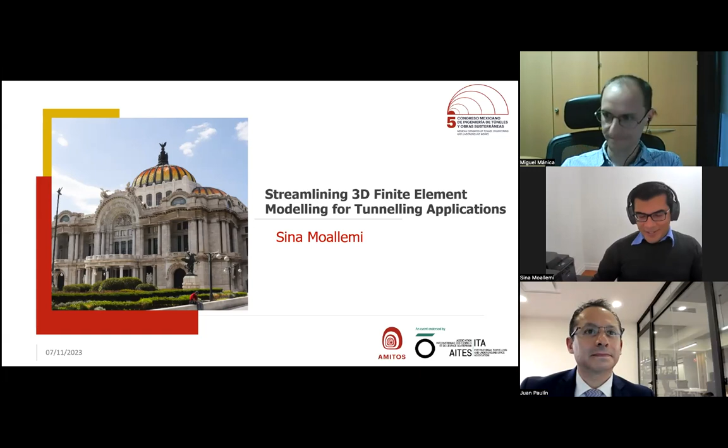Okay, without further ado, let's talk about tunneling. So the topic for today's presentation is streamlining 3D finite element modeling for tunneling applications. The agenda for today is shown here. First, I'm going to introduce briefly Rocscience and one of our programs called RS3. I'll introduce you to the tunnel designer tool that we have in the program, and then we do a demo together to create a 3D model with tunneling and sequential excavation.

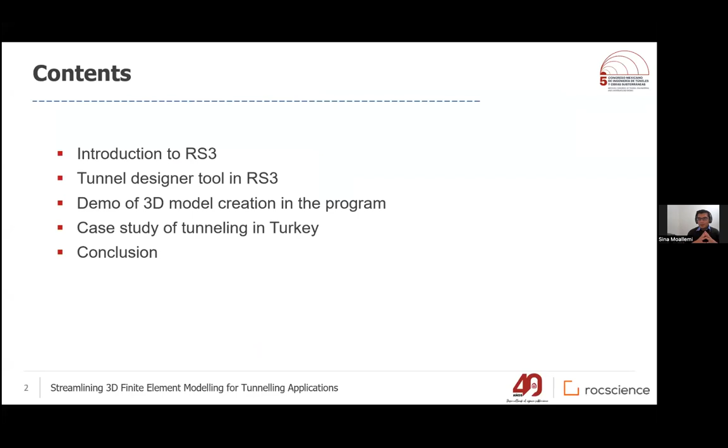Then I show you a case study that I created based on one of the papers and real cases in Turkey, and at the end we are going to do the final conclusion. So about Rocscience, we are the world leader in developing innovative 2D and 3D software for civil, for mining, and for geotechnical engineering.

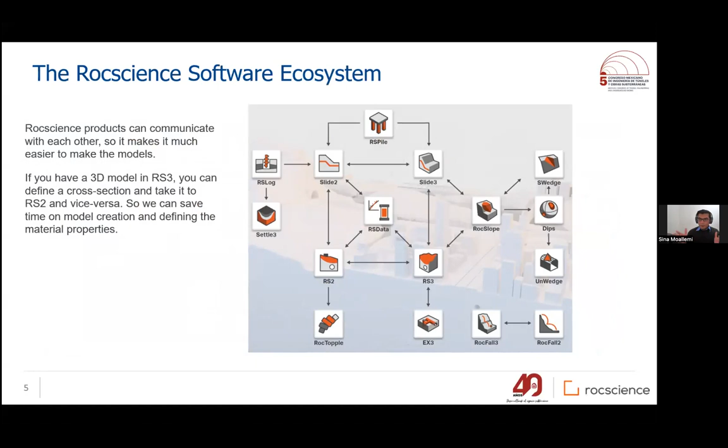One of the benefits of using our programs is that they can communicate with each other. For example, if you have a 3D model and you want to take a specific section into RS2 and do the 2D analysis on it, in your program, you can create it. You don't need to recreate your geometry. You don't need to go and redefine your material properties. So these are all the benefits that you can get if you use a combination of our products.

But today's focus is on RS3. RS3 is our 3D general finite element package with a wide range of applications. I can categorize that into mining engineering and civil engineering. For mining, you can do a slope analysis. You can do modeling of large-scale mines, as you can see here, or you can do sequential underground excavation.

We recently added a new functionality to the program called Discrete Fracture Network, which makes modeling joints in 3D and creating them in 3D much simpler than before. It's going to make RS3 very unique in the market.

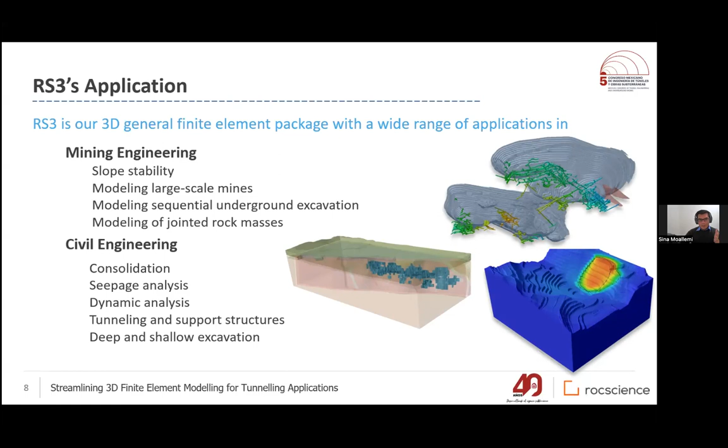And for civil engineering, you can do consolidation, seepage analysis, dynamic analysis. With the built-in tool that is called Tunnel Designer, you can create tunnels, you can assign the supports, and that's what we are going to focus on today. And also you can do deep and shallow excavation.

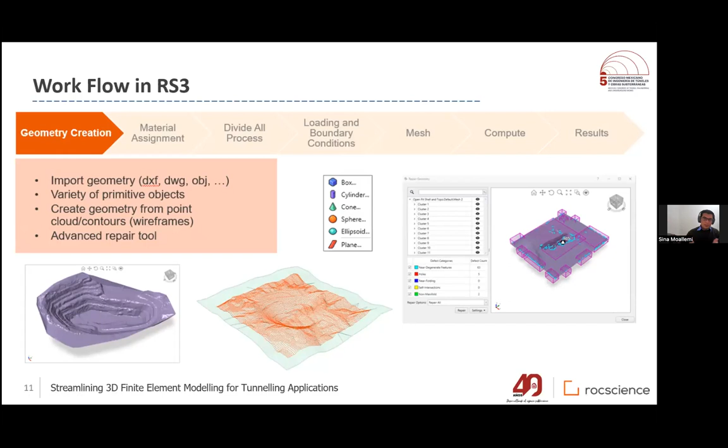We have a very powerful repair tool, so it can look at the geometry. If, for example, there is a hole on the surface, or if there is a very edgy surface in the imported geometry, it can fix it for you, it can repair it for you. Also, if you have, for example, a point cloud, you can import it to the program, and then it's going to create the surface based on the imported points for you.

Next step is defining the materials. In RS3, we have a comprehensive material library for soil and for rocks, like Mohr-Coulomb, generalized Hoek-Brown, anisotropic materials. In addition to that, we have a borehole manager, so if you know the location of the boreholes and you know the layers, the thickness of each layer and the assigned material, you can define them in the program, and we are going to create the geometry for it. That's actually what we are going to use in the demo today.

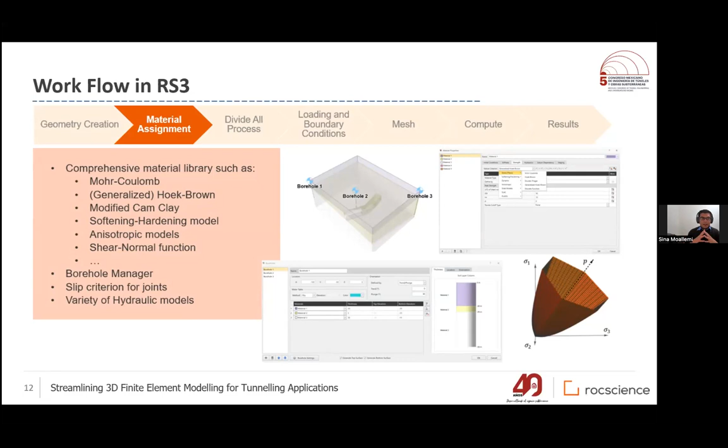And then you need to do a 3D Boolean operation when you are bringing different objects, different volumes and surfaces to the model. We need to find the intersections between them, and that's what you are going to do in the divide all process. The first three parts are almost shared between all of our 3D packages.

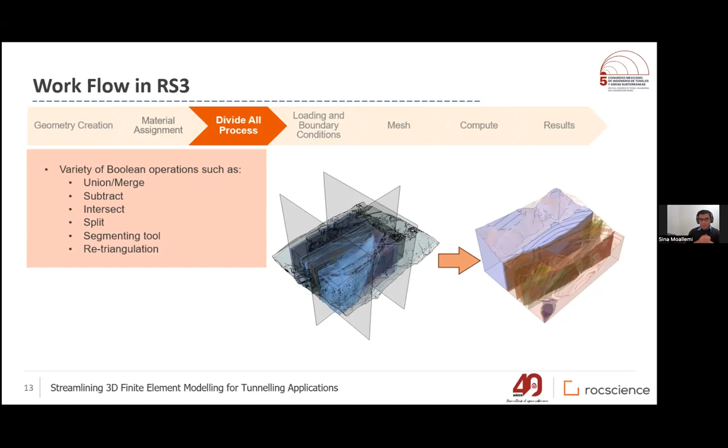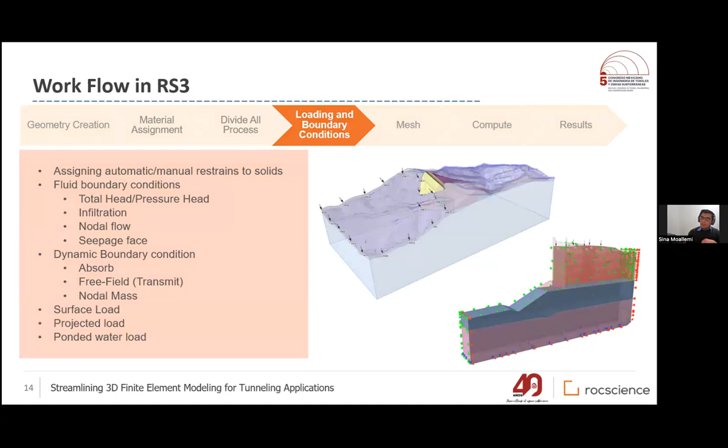Depending on the type of analysis that you have, for example, if you have seepage analysis or dynamic analysis, you can have different types of boundary conditions. You can, for example, assign the total head or pressure head on one side of the geometry. You can have, for example, absorbing boundary condition, nodal mass, or free field. If you have the dynamic analysis, you can also define the projected load. So you set the location of the load, and then it's going to project it to your geometry, which makes the modeling much easier.

After you define the loading and boundary conditions, you need to define the 3D mesh. In RS3, we have tetrahedral elements. They can be either 4-noded or 10-noded. The mesh generation is automatic in the program, but if you want to, let's say, create a denser mesh in a specific area, you can tell the program by defining a refinement region.

And after you define the mesh, it's all ready to do the computation. In RS3, you can also do the SSR analysis, which is shear strength reduction method. So if you have a slope, you can find the factor of safety. You can do fully coupled or uncoupled solid fluid analysis, and also dynamic simulation.

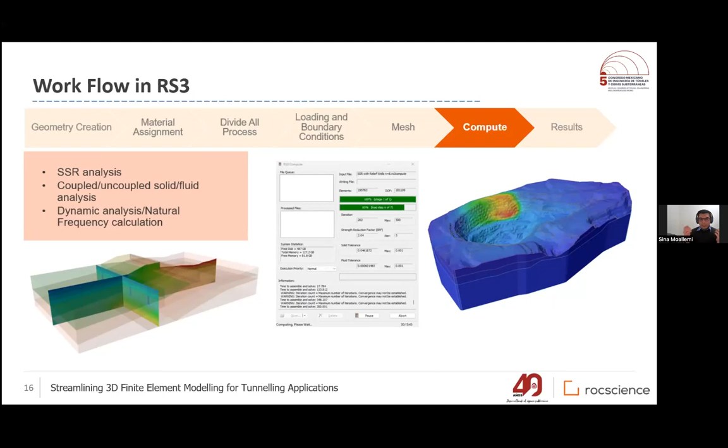When your analysis is done, you can go to the result tab and see your results. You can see them on the external boundary, and the excavation boundaries. You can, for example, have cutting planes to see the results on a specific plane that you want. Or you can define query lines, and export them to Excel to compare your results with, let's say, analytical solution.

Also, if you have sensor data or LiDAR data, or have them as a CSV file, you can import them into the model and compare your results with the measured data from the site. That's another functionality that we have in RS3.

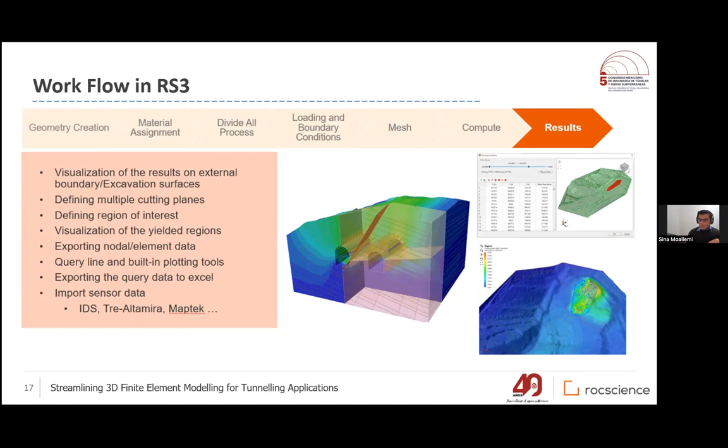So that was a brief introduction of the program. But now let's talk about tunneling and how RS3 can help us for modeling tunnels. We added a feature a few years ago in RS3 called Tunnel Designer. But before I explain it, I want to mention why we added this tool to the program.

Imagine you have a simple tunnel, let's say a cylindrical shaped tunnel, and you want to do sequential excavation. Before we added this feature, you needed to divide the cylinder into smaller pieces, then define multiple stages, pick each of these small pieces, and update the materials to tell the program this region is going to be excavated. And then if you want to have, for example, bolts or liner around the tunnel, you need to pick the surface and do all of these steps manually, which can be extremely frustrating and time consuming.

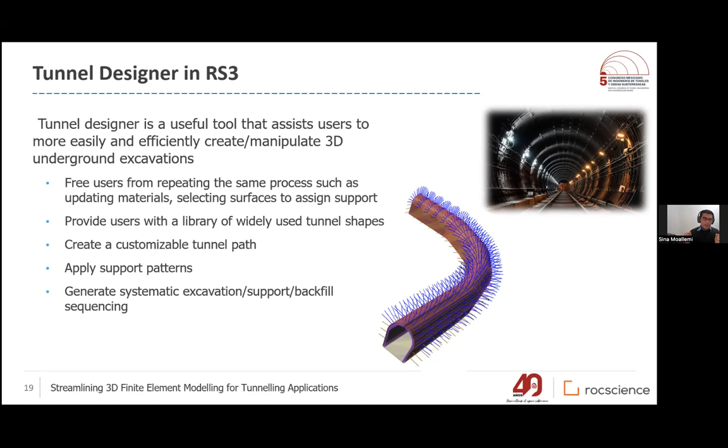And for each tunnel, there are different functions. For example, you can define the profile, the shape of the tunnel. You can define the path. You can define the sequence of the excavation.

The steps of using the tunnel designer tool are shown here. First, you need to create the profile of the tunnel. You can even draw it in the tool, or if you have the location of them, like in AutoCAD, you can import the coordinates and it's going to create it for you.

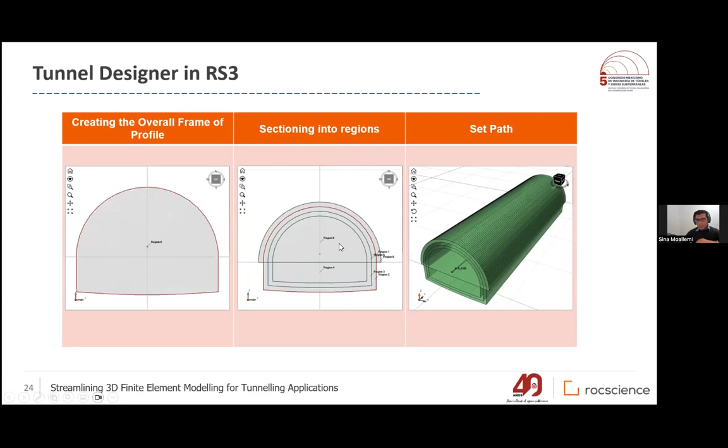Then you need to section your profile into smaller regions in case you need to. For example, if you want to excavate first the top part and then continue the bottom part of the profile, you need to define multiple sections here. And then you need to define the path to make it 3D.

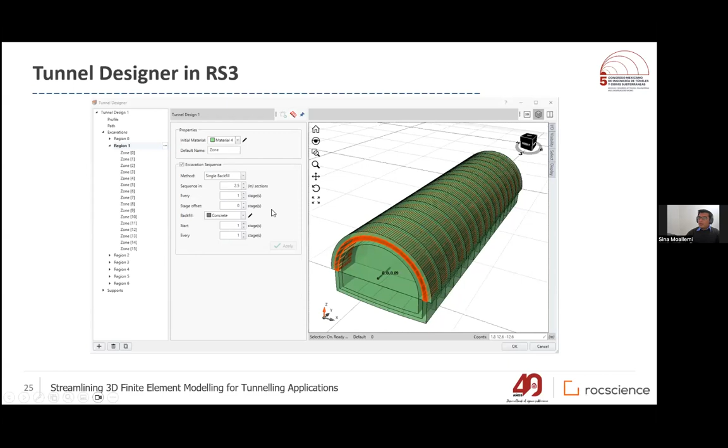Then you can define the sequence of excavation. For example, you can tell the program, excavate for me every 2.5 meters, and keep repeating that at each stage. You can see that initial tunnel path we had, now it's divided into smaller pieces with a length of 2.5 meters.

And then you can go and define the different types of supports. In RS3, we have beams, bolts, and also liners. And then you can mention when these supports are going to be added to the program. So it's a general scheme of how you can use the program and the tool.

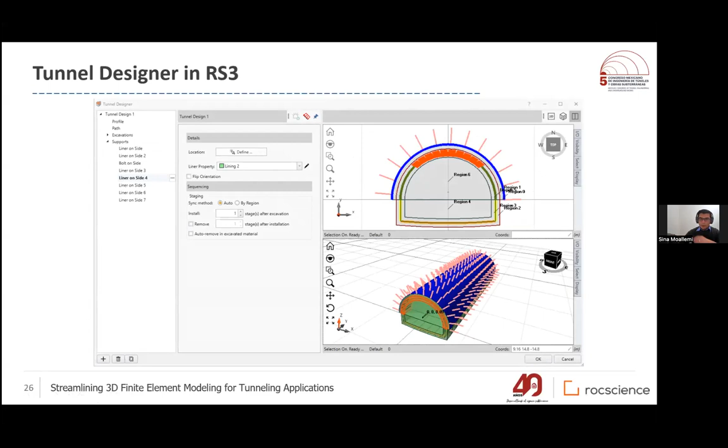But before it gets late, let's start the first demo to see how we can really go and create some tunnels in RS3. So this is what we are going to make in just a few minutes with the help of the tool. So I'm going to open RS3.

This is the raw file that I already created in advance, and the only information that we have are the boreholes. I defined it already just to save some time, but I'll show you how to define the borehole information.

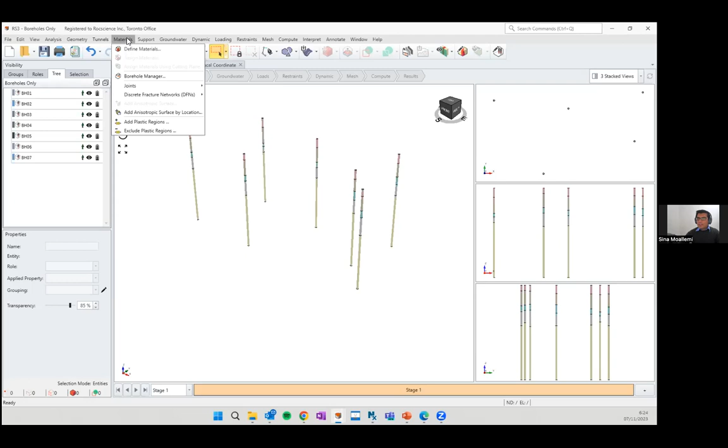You need to go to material, then go to the borehole manager. There you can define any number of boreholes that you might have in your site. You need to specify the location of the borehole, define the orientation, and then tell the program how many layers are in the borehole and what properties are assigned. That's what I did already in the program.

If you go to the location tab, you can see all the boreholes in the model, and any one that is selected becomes highlighted. If I move to a different one, it will be highlighted too. That's how you can define the boreholes. Okay, I have them now defined in the model.

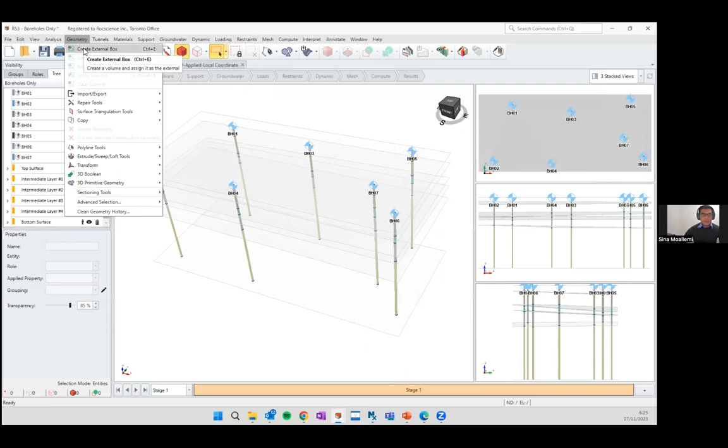Next step is I want to create the geometry based on this borehole location. So I go to the geometry tab and create an external box. I want to tell the program where my geometry basically exists, what geometry I want to model. So you go and create the external box, and you specify the corners of the box.

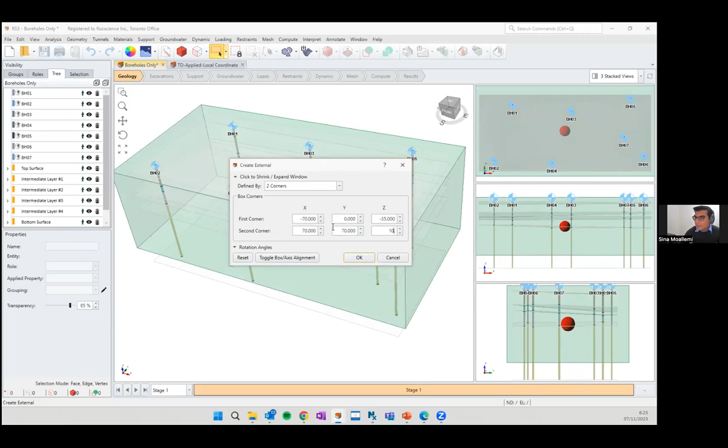Let me input the numbers. This is one of the corners, and I'm going to define the second corner. And you click OK. So now I have a box, external box, and I also have this borehole.

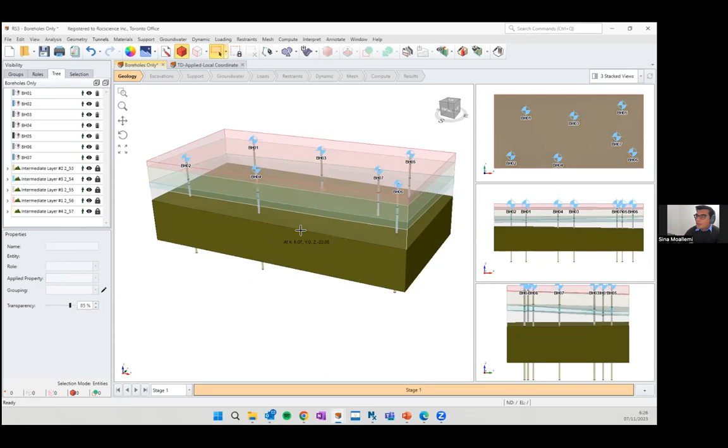To intersect the borehole information with the box, as I mentioned earlier, you need to do a process called divide all. So I do the divide all process to detect all the layers, and now you can see all of those layers based on the borehole information are created for me.

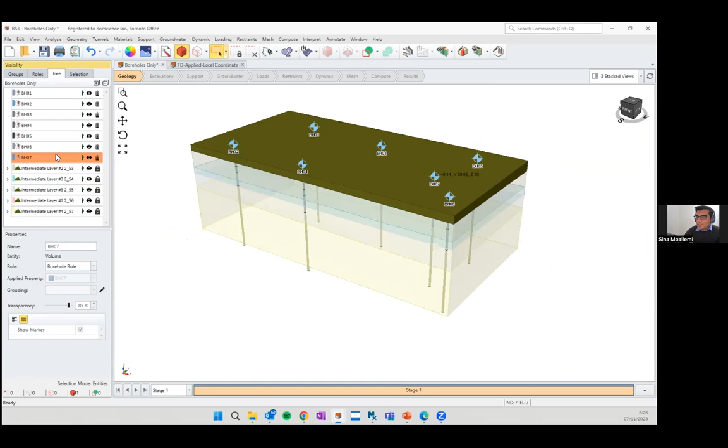You can see them in different views. If you double click in any of the views, you will maximize that. And since we don't need any other information for the boreholes, I select them and hide them.

The only thing we see now is the geometry. Here you can also change the transparency of the geometry. Okay, so the geometry is made.

The next step is to go and create the tunnels. You go to the tunnel menu and pick Tunnel Designer. The window that I showed you earlier will appear, and now we are going to input the information.

First step, you can rename your tunnel. For example, I'm going to call it tunnel example. And then you select the profile. Here we are going to define the profile. If you select the tunnel, we have different predefined shapes.

For example, a square cavern, or you have a horseshoe shape. You can update the parameters for it to get what is in your mind for the tunnel design.

Or if you have the information of the tunnel profile, you can click on data table and copy and paste the information of the coordinates around the tunnel, paste it here, and it will create it for you. Or if you don't have any of that, like me, you just go and draw it.

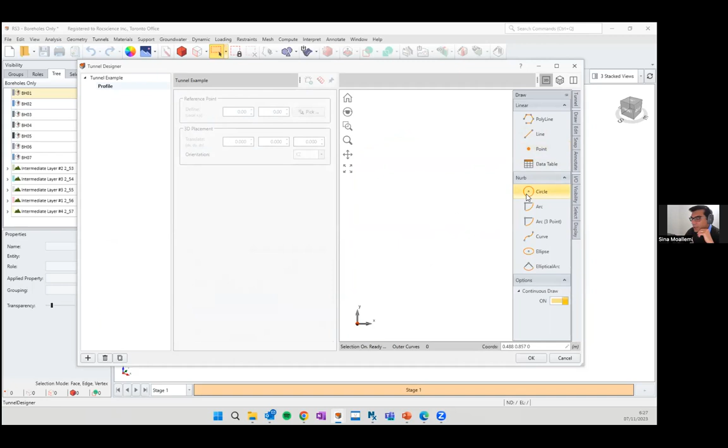So I'm going to create the simplest tunnel, which is the circle. I click on it, it asks me to define the center, so 0 and 0. I hit enter, and then it asks me to define the radius, so I'm going to set the radius to be 3.5. And there we go, the tunnel profile is created for me.

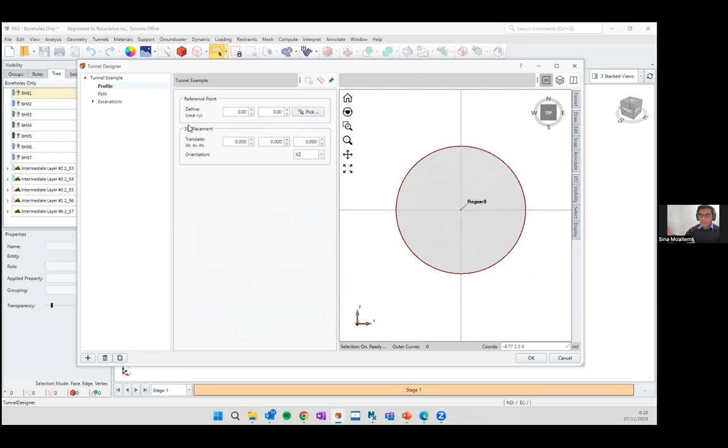The origin of that, the reference point, is 0, 0. This is an important location because later on, when I want to assign the tunnel to the geometry, I'm going to say, okay, move this reference point to this specific location that I want.

All right, so we defined the tunnel profile. Let's go and define the path. You can either extrude it, or if you have the coordinates of the path, you can again import it as a CSV file and it will draw it for you, or you can even draw it.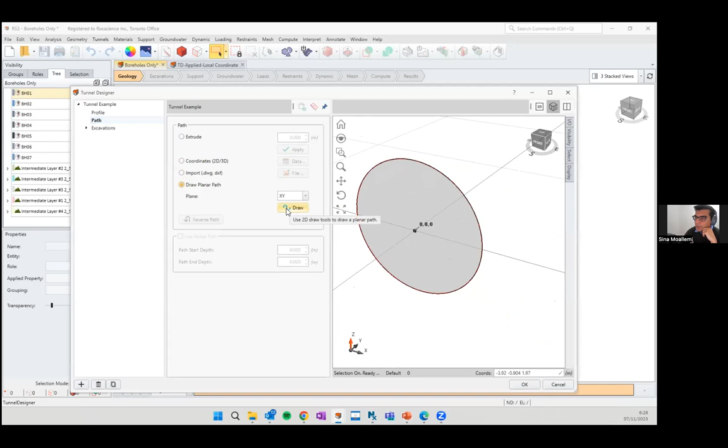So if, for example, I click draw, here I'm just going to draw some random line, and you can see the tunnel can be created for us. But for simplicity, I'm going to change it to just extrude it. I set it as 70, and now you can see I have a tunnel with the profile and a length of 70.

Next step is excavation. You click on the excavation. Here we only had one region for the profile. I select it, and now I can ask the program to do sequential excavation for me.

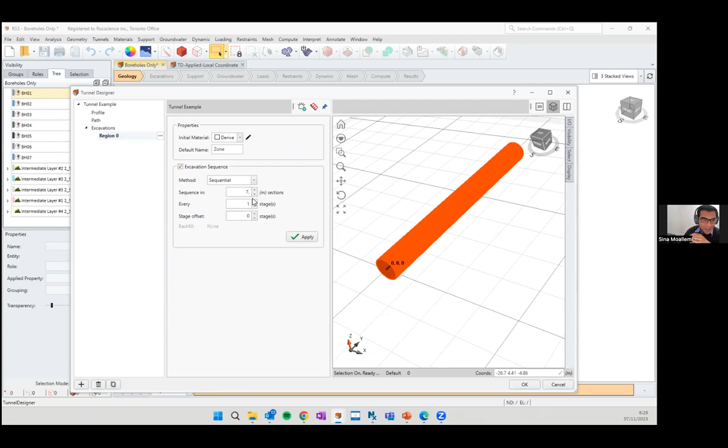So I check that option on, and I want the program to do the excavation every 7 meters. I know 7 meters is a lot, but it's just the demo, so let's go with it. When you update the length of the sequence, you can see it is now divided into smaller pieces.

Now I have 10 pieces created for me. I'm telling the program at every stage, starting from the moment I'm assigning the tunnel to the model, do the excavation. So in stage 0, when I'm adding the tunnel to the model, the first 7 meters is going to be excavated. In the second stage, the next part is excavated, and so on. But in most models, you want the first stage to be only the field stress, and then you do the excavation. So I'm gonna change it to stage 1 and click apply.

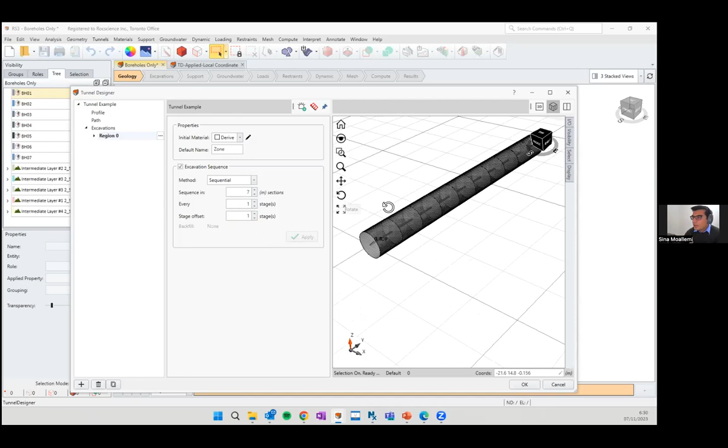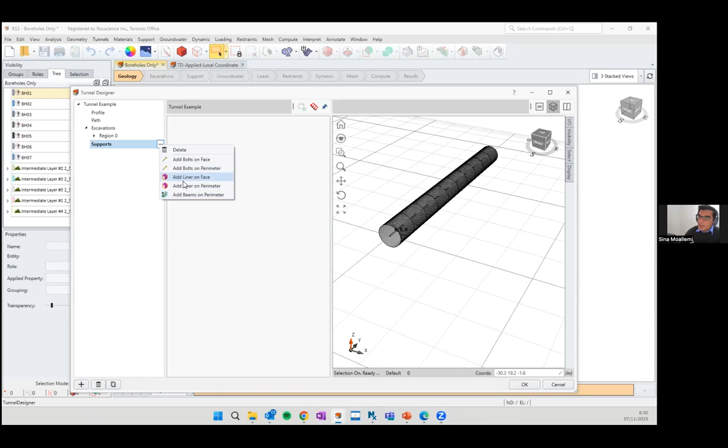Okay, the sequential excavation is defined. Next step is to add support. So I click add support, and you can see the different options for it. You can have bolts on the face or perimeter of the tunnel, the same thing for liner, or you can have beams. First, let's add the liner.

So the program asks you where is the location of this liner, so you need to define it. You click on define, and then pick some points all around the tunnel. And then when you are done, you right click and hit done. There you go, the liner is added for me.

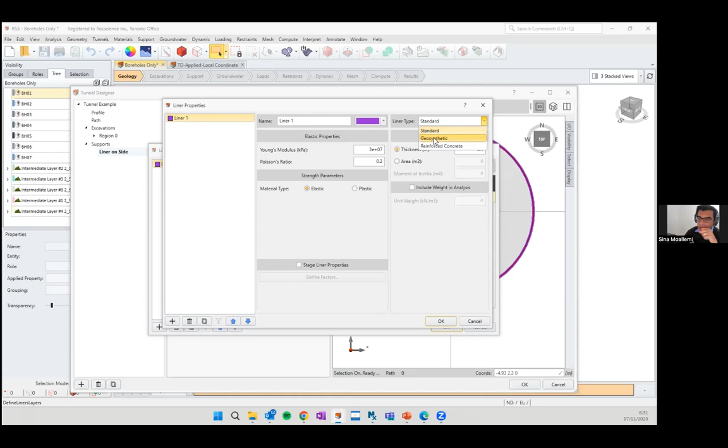Next, you need to specify the liner property. If you click on this pencil icon, you can see that for liner we have a standard plate element. You can have geosynthetic, which works only on tension, or reinforced concrete, where you define the ratio of reinforcement and concrete, and then you can do the analysis.

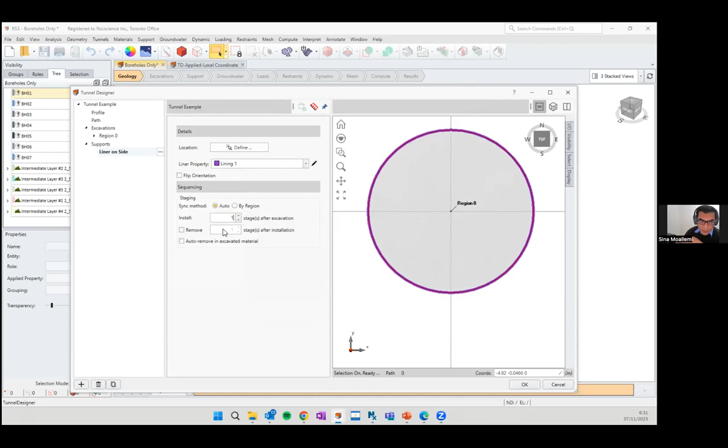So I define the location of the liners, and then I can say install the liner one stage after each excavation. In case you have some temporary lining in your design, you can also tell the program to remove it after a certain amount of stages.

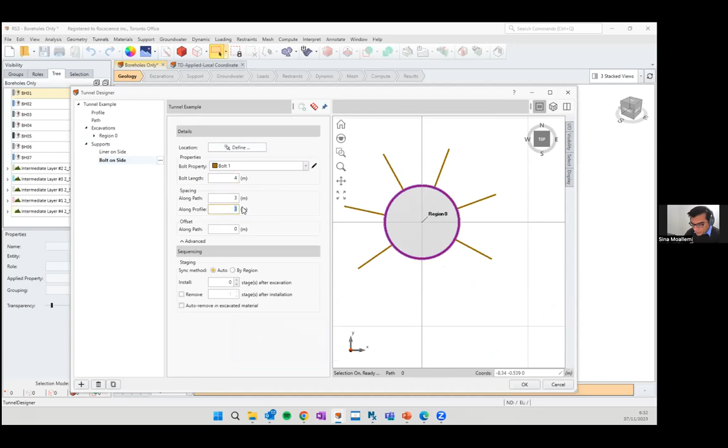Now let's add bolts, but this time instead of adding the bolts all around it, I want to assign it only to a portion of the liner tunnel. And you click done. You can change the length of the bolt, and you can change the spacing of the bolt, for example 1 meter, to make it very dense.

And if you view that in 3D, you can see the spacing along the path. So I'm going to reduce it to 2.5. There is also an offset option for us, so you can see the bolts are added right at the face of the tunnel. We don't want that, we want to add some offset for the bolts.

By default, all the bolts are added normal to the face, but you can always specify the orientation for them if you want to. Similar to the liner, you can say when the bolts are going to be added and when they are going to be removed. All right, that's it.

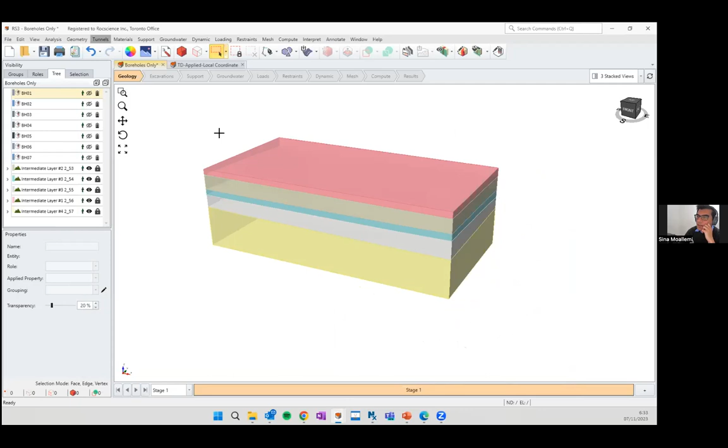So that's how you can define the sequence of excavation for your tunneling. And then I click OK. Now let's add these tunnels to the model. So you go to tunnel, add tunnel. You pick the tunnel you defined.

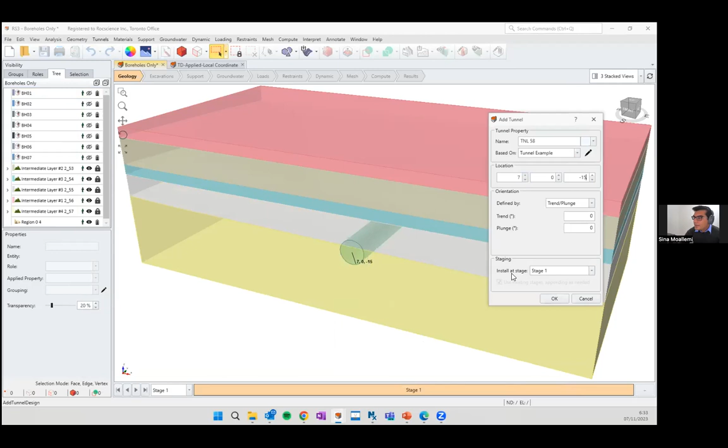We only had one, so we pick that one, and then you pick the location. Remember, I mentioned the reference point before was 0, 0. Now I'm going to ask the program to move this to, for example, 7 and -15, and add this at stage 1. And then you click OK. There you go, the tunnel is added.

Let me hide these layers to see what we really created in the tunnel designer. If you go to the support tab, as I mentioned, the first stage we just want to have the field stress. We don't want to see any excavation, and we are not seeing any.

Then next stage, we did the excavation. The stage after that, I expect two things: one is to see the bolts and lining around the first excavation, and also the second sequence should be excavated. And you can see it is all added for me. Very simple, just with a few clicks.

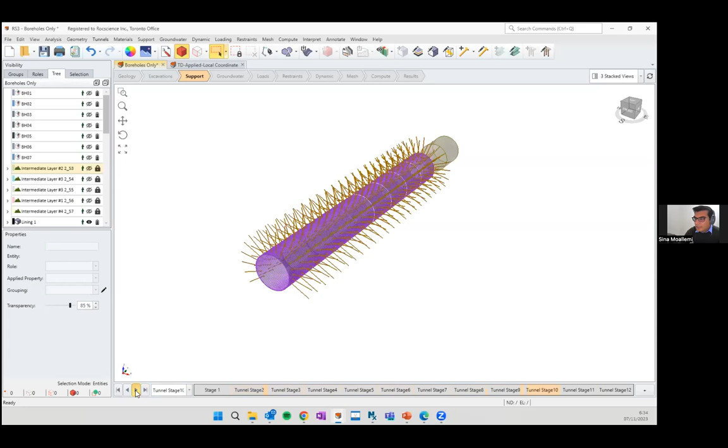Let's go ahead and add another tunnel in a different location.

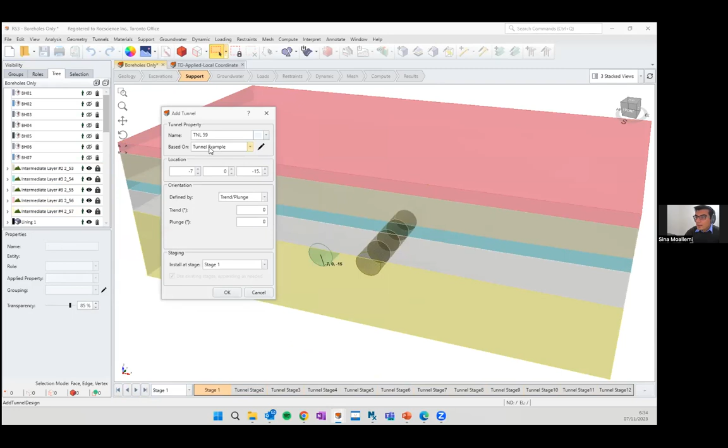Tunnel, add tunnel. And this time I want it to be -7 and -15. This time I want to add the tunnel, not in the first stage. I want to add it, for example, in stage 6. And then you click OK. You can also see the number of stages at the bottom. And whenever you add the tunnel, the number of stages will be extended.

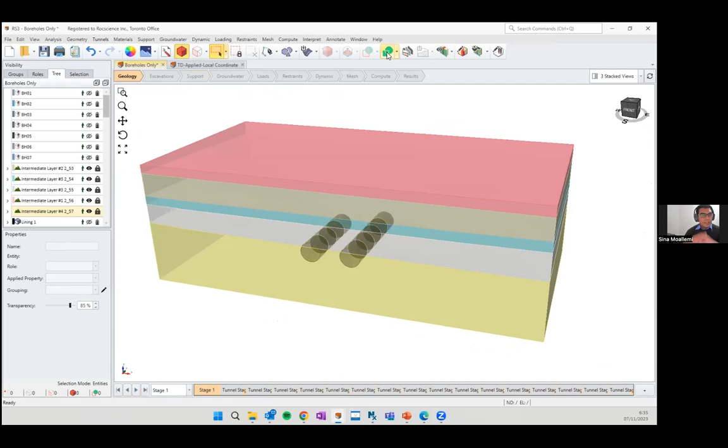OK, so one more time, let me hide the layers. And this time when I'm moving in the stages, you can see two different sequences for the tunneling. Very simple. So we added the tunnel. Next step for modeling is to do the divide all. I want to find the intersections between these tunnels and the geometry we just made. So I click divide all. Now the divide process is finished.

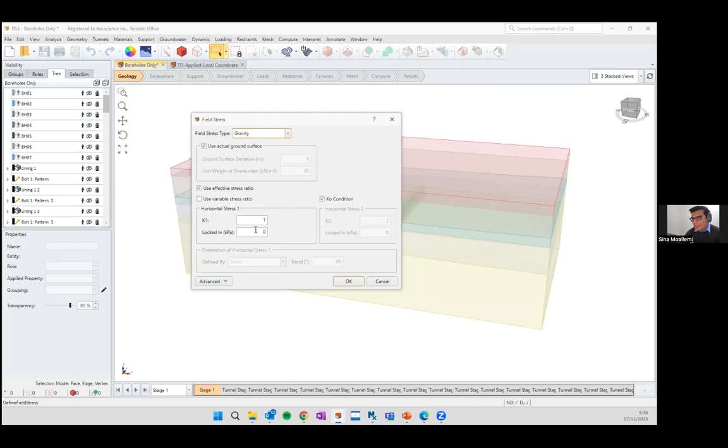Next step is to make sure the initial loading is what we want to have. So if you go to the field stress tab, you have two different options. You can either have a constant field stress or a gravitational, and you can mention the ratio between the vertical and horizontal stresses. So here we have K0 condition, which means they are the same. I'm not going to change the default.

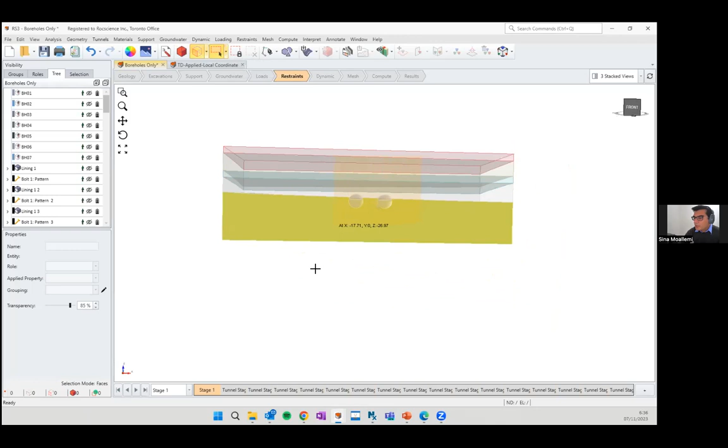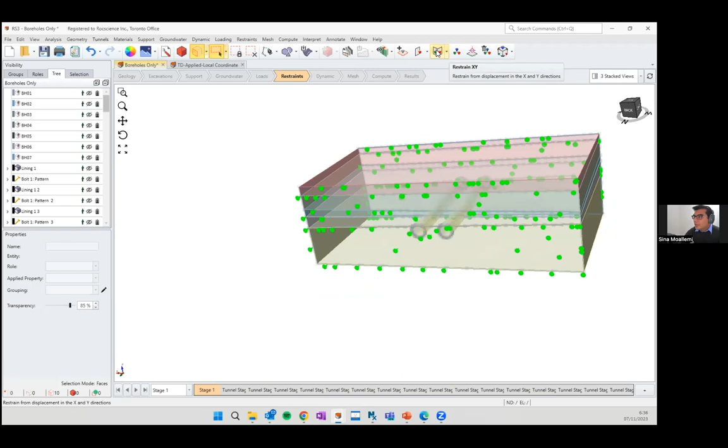Then we can apply the restraint. We need to fix these two faces in Y direction. So I'm going to change my selection mode to face selection. I'm going to select this face, hold the control key, select the other face, and fix it in Y direction. I'm going to select these two and fix them in X and Y. And the bottom part is going to be fixed in X, Y, and Z direction.

That's it. Next, you need to create the mesh. So I'm gonna go create the mesh. You have two different options. You can either have uniform or graded. Uniform means you are going to have the same element size everywhere in your geometry. But if you use graded, the program is smart. Wherever you have the excavation, for example, around the tunnel, it's going to give you a denser mesh, and when you are far from the tunnel, it's going to give you larger elements.

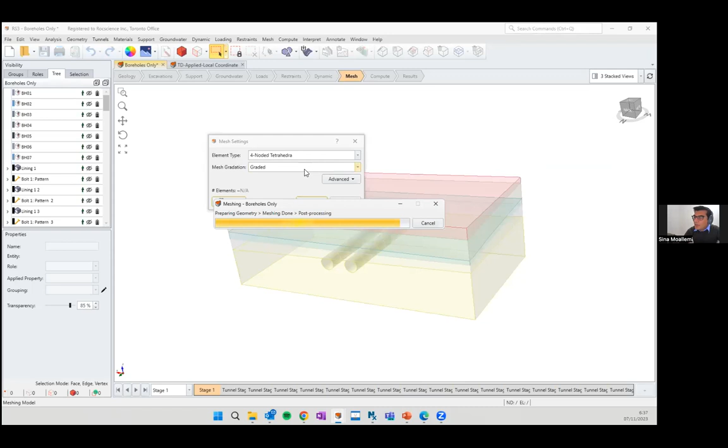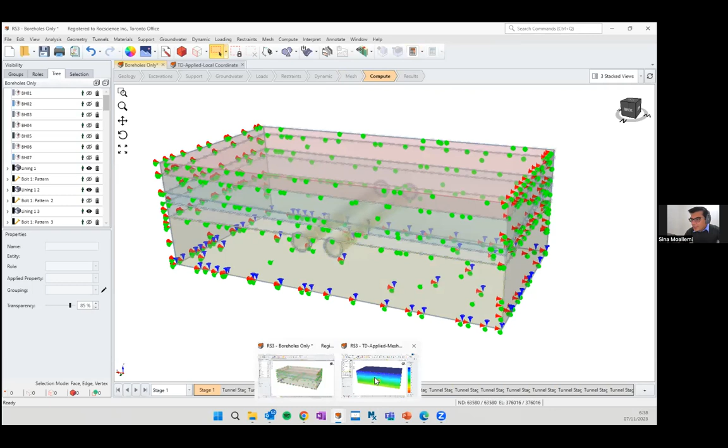And you can see that here. Around the tunnel is very dense, and far from it, it's a larger element size. And that's it. So we created our model. You can go to compute and hit compute, and you will see your results. I already computed. It's going to take around 3 to 4 minutes to run for all 18 or 17 stages.

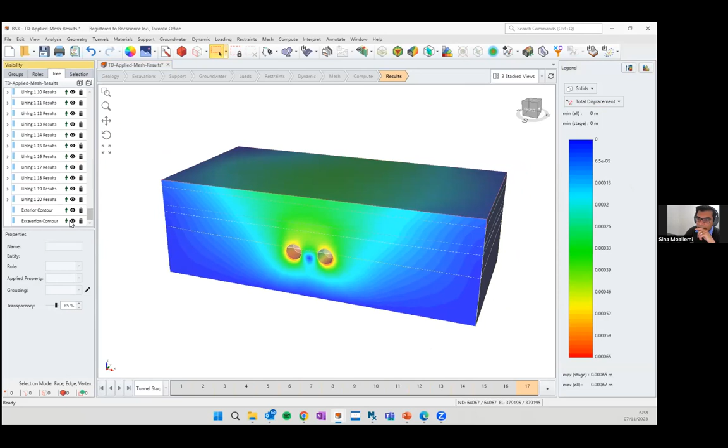And then when it is done, you will be able to see results on the external boundary. You can see, for example, sigma 1, sigma 2, or displacement in your model. If you want to see the results only around the tunnel, you need to hide the exterior contour and activate the excavation contour. I already did that before. You can see the results only around the tunnel.

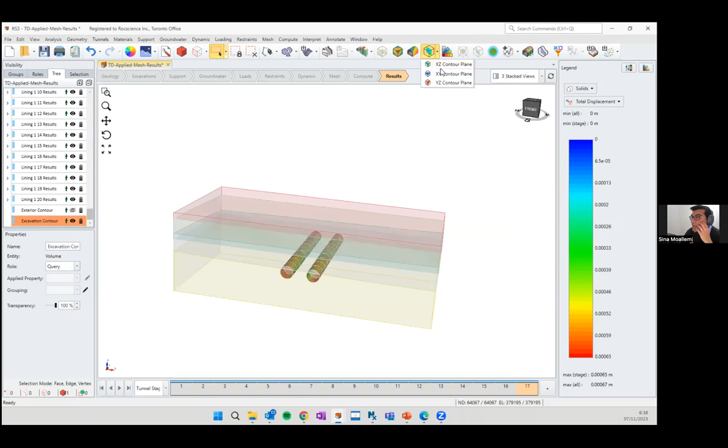Or if you want to have a contour plane, for example, I want a plane in XZ coordinate. You click add. Now you see the results of the total displacement in the specific location that we wanted.

So we already see the results for solid. If you want to see the results for, for example, bolts or liners, you need to change the data type. For example, if you switch to liners, you can see information such as displacement, axial forces or moments. But one of the important things for tunneling is we don't want to see the lining results in the global coordinate. We want to see them in the local coordinate of the tunnel.

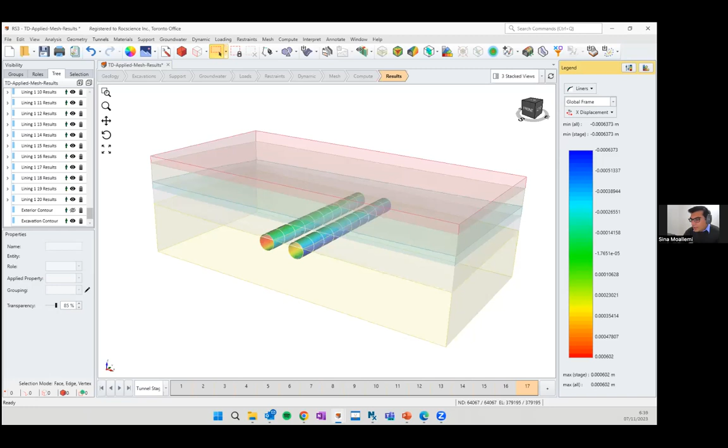About 2 years ago, we added this functionality in RS3. Let me show you how you can define the lining coordinate. So I go back to the previous model. This is actually the model that we were making together, without the mesh. What you need to do is pick all the surfaces around the tunnels where you want to define those local coordinates. I already defined those surfaces.

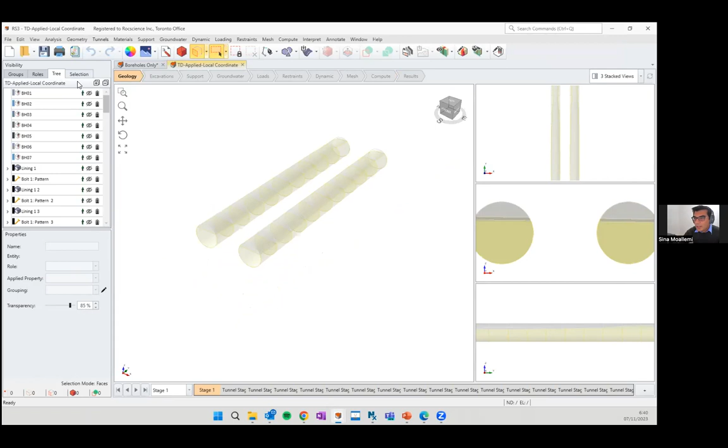You just need to pick all of them, then go to support, liners, and define liner local coordinate for tunnels. And then the program asks you what is the direction of the tunnel. It is extruded in Y direction. And then you click OK.

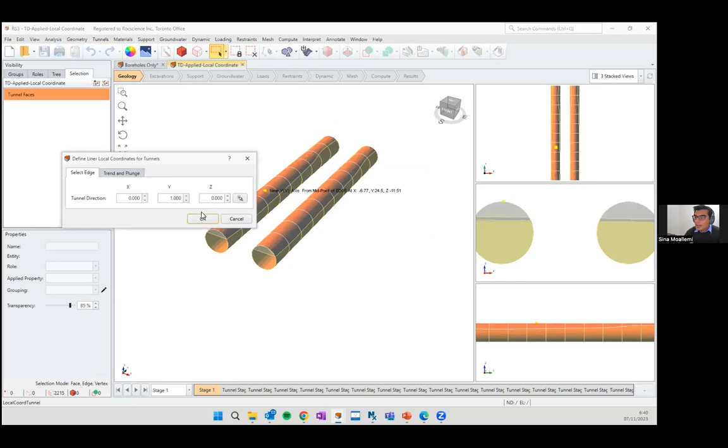Now you can see this tunnel frame is created for me. The X direction is along the tunnel, Y is in the direction of the path, and Z direction is normal to the tunnel. So when we want to see the results for the liner in this local coordinate, you need to ask the program to show you the results in the tunnel frame that we just defined instead of global. And that's how you can get your results in the proper coordinate.

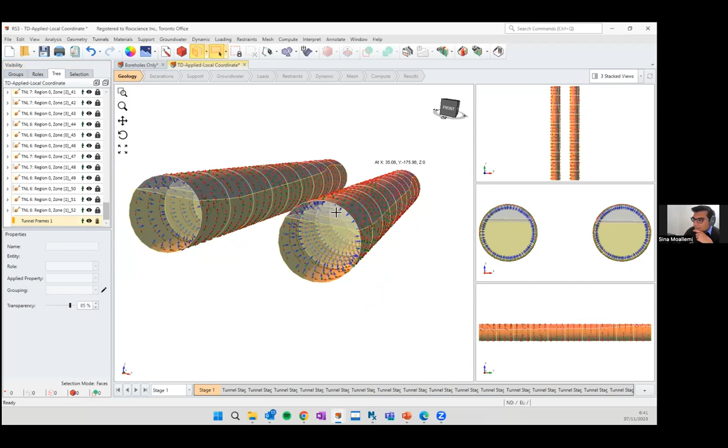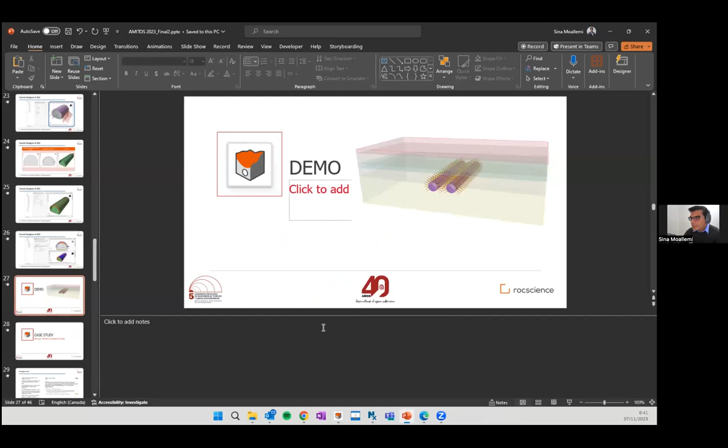What they were focusing on was modeling of a tunnel for a high-speed train project with a length of 1.2 kilometers, not too long. But the tunnel was placed in a weak ground condition. The tunneling was started in 2013. However, at the beginning of the excavation, they saw a failure of the tunnel. So they needed to update their design. They revised that, and then they did the full project.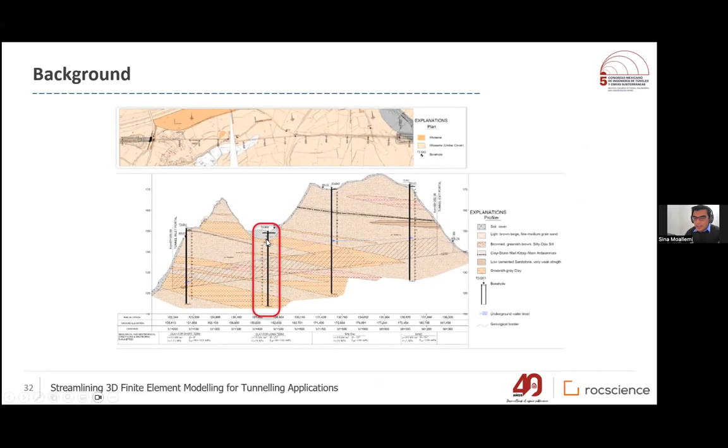These black bold lines are basically the boreholes. We are focusing on only this specific section. You can see there are 9 layers of materials that I defined in the borehole manager. We had a sand layer, clay layer, and silt layer. I used the Mohr-Coulomb criterion to define the properties of each.

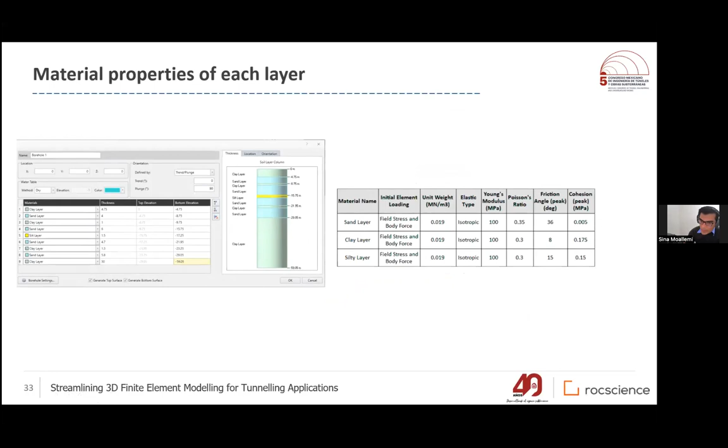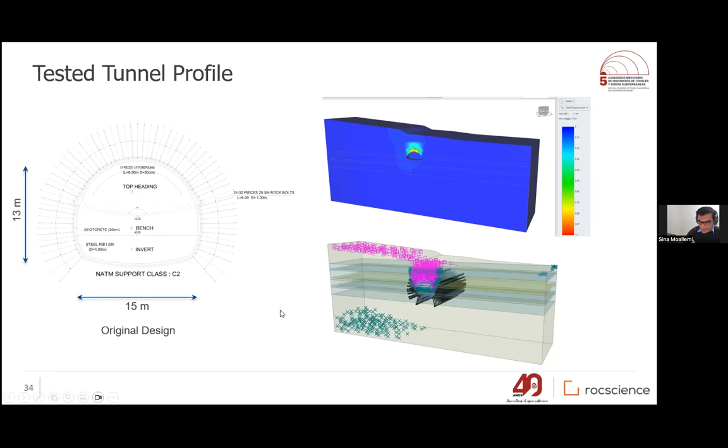The first thing that I did, I tested the original design. This is how the original tunneling design looked. I applied that using Tunnel Designer to the model. And after 1 or 2 stages of excavation, I saw a huge failure. I got like 1.1 meter displacement, and the program didn't even converge, which is a good indication that your design is not safe. And also you can see the failed elements. I was happy that I could capture that numerically.

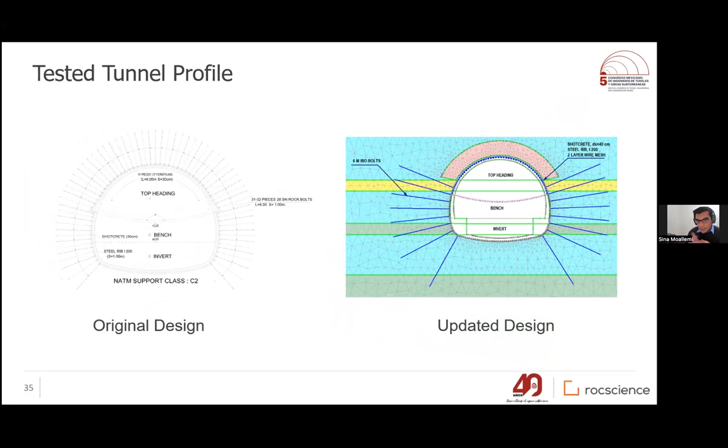So what they did, they updated the design. The main change was they added forepoling, or grouting on top of the tunnel to make it stiffer, and then they did the excavation. So I did the same thing in RS3. Here you can see an animation of how the sequence of excavation was done.

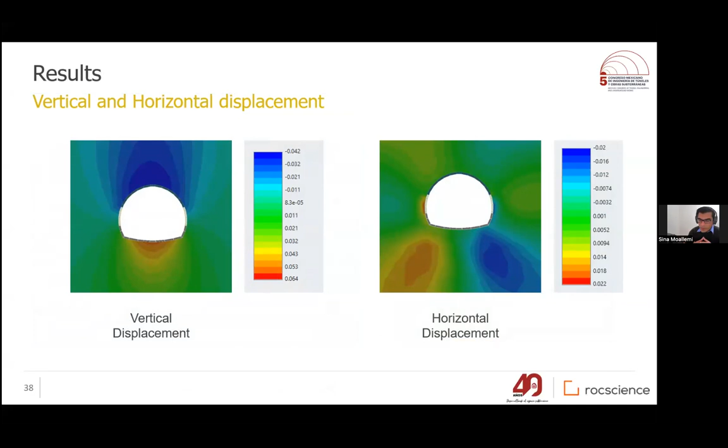And here are the results that I got. The maximum vertical displacement from the top section of the tunnel was around 4 centimeters, and 2 centimeters for the horizontal displacement on each side of the tunnel. Also, here you can see the vertical and horizontal displacement, its propagation after each sequence of excavation.

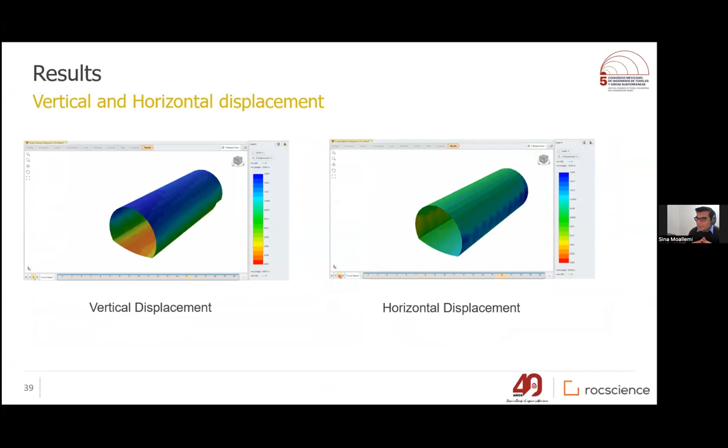Here you can see the results for the liner. I got the results in the liner local coordinate, as I explained to you earlier. You can see the circumferential force, normal displacement, and also moments around the y-axis. Y is basically along the path of the tunnel.

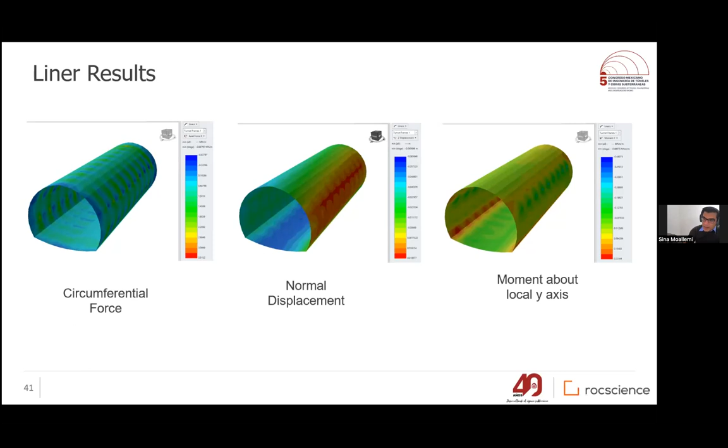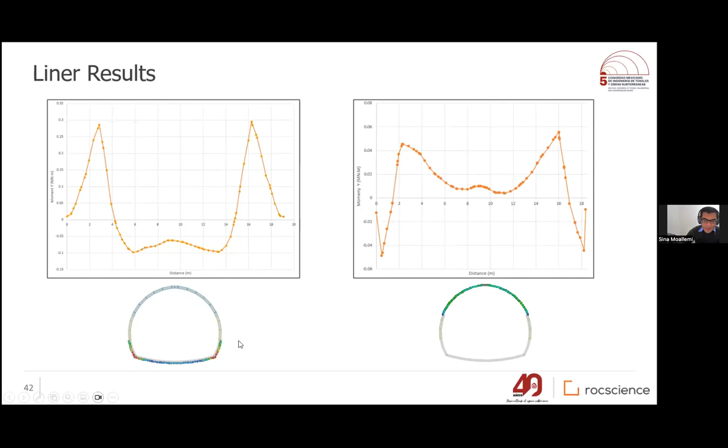And I defined the query lines, so you can see the moments around each of the liners, the liner on the top and also another liner on the bottom. These huge values are basically concentrated at the corners, and as you know, at the corners we always have the singularity, so that's why the moment is a little bit high.

In addition to that, I did a dynamic analysis. I found one of the records, the earthquake records in Turkey, and I applied the acceleration to the base of the model. And also I used the free field boundary condition on each side of the geometry. And I did the dynamic analysis, and I captured the horizontal and vertical displacement on the top and on the side of the tunnel. So the maximum change in the horizontal was measured about 2 centimeters and also 1 centimeter for the vertical displacement.

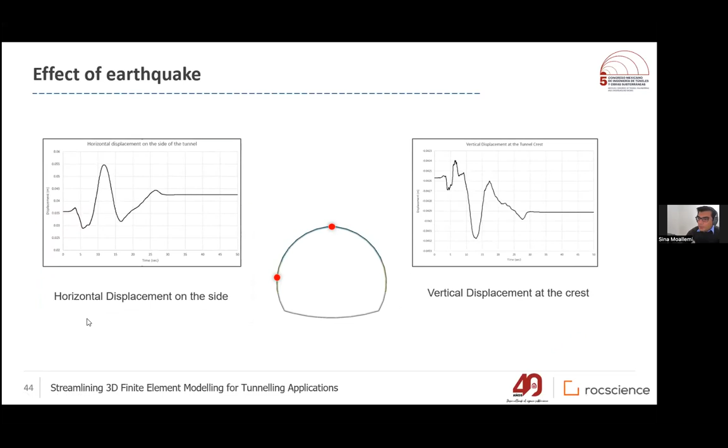That's all I wanted to mention today. So let's just do the quick conclusion here. As you saw in RS3, with the help of Tunnel Designer, you can do the full 3D analysis of a real project. You can do it very quickly using the tool. We saw the effect of supports, lining, bolts. We could do the sequential excavation. We could do the seismic analysis, all using the program. But my main point here is the last one.

So whenever I'm going to the conferences or see the case studies, most of the time for tunneling, I'm just seeing they are doing the 2D analysis, which I think is not good. With the improvement in the softwares and in computers, the 3D analysis for tunneling is inevitable. Using the classical and experimental formulation to model the whole tunnel with just a 2D cross-section cannot see the real 3D effect of excavation, and the results are always debatable. However, as you saw here, using a powerful 3D program like RS3 can help you to do the full analysis and help for a proper design.

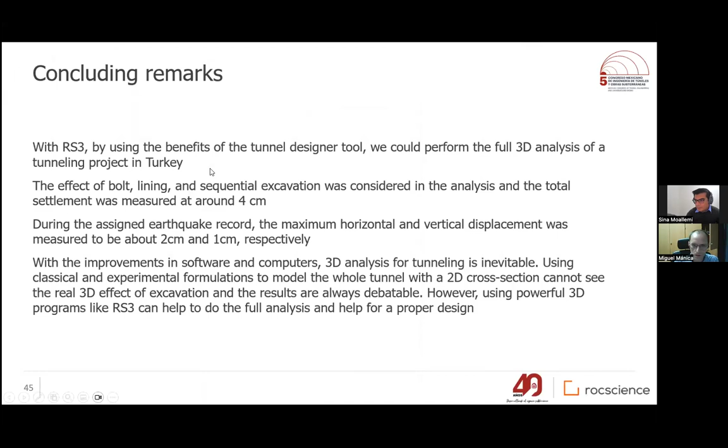Yeah, very good. And maybe just one last question from myself. I saw there is another one from Pauline. The safety factor is calculated with the phi reduction criterion? Yeah, so we are using the shear strength reduction. For example, if your material is Mohr-Coulomb, then when your analysis is finished, you can always do SSR at the end.

What we are doing, we are updating the C and phi and rerunning the model. We keep repeating it until we reach a moment that we cannot solve the equilibrium, when your model is not converging, and that's the point we are considering as the safety factor. You should always design it to be strong enough, basically.